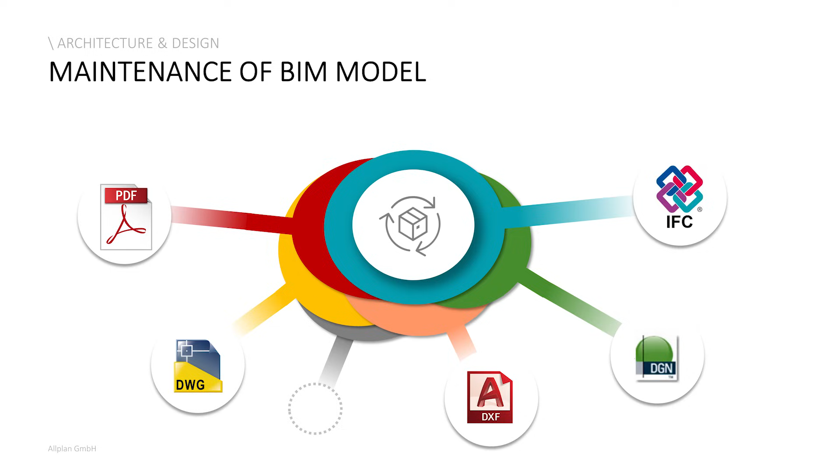With this demand, we will introduce a reference manager in Allplan, and it will support various file formats, but of course with main focus on IFC reference, with some further nice features.

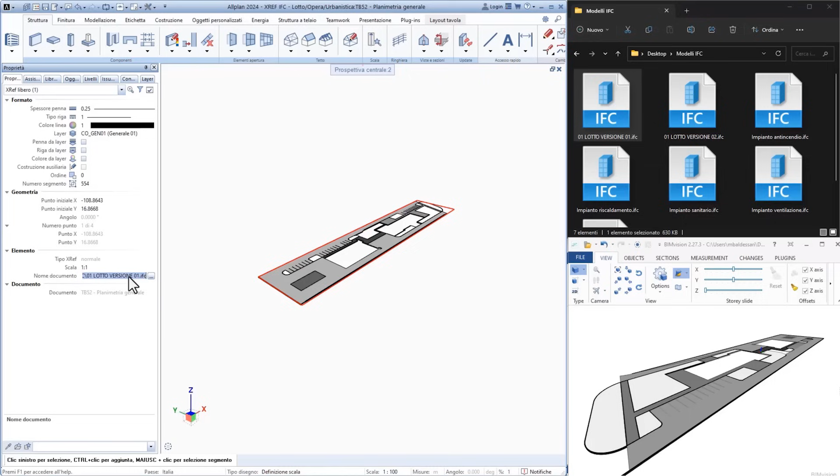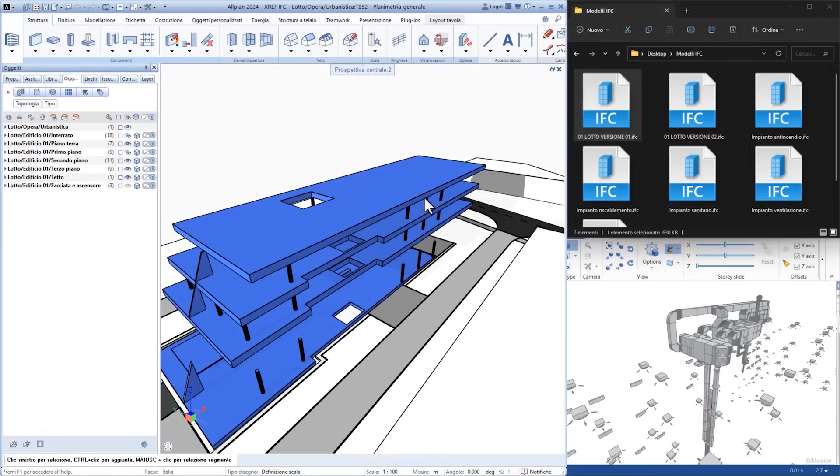Here is an example of how it currently works in Allplan. We have a situation when we don't want to import anything, just want a geometry check of two separate models. This means we need just something like a viewer in Allplan, and we can add some remarks or report issues. We could use a separate viewer, but we'd need to open an extra window, use the right viewer, and maybe export the latest version of our master model again - which really doesn't sound effective. So instead we can choose what we want to see directly in Allplan and add a custom XREF, a referenced IFC file. Check what is needed, and the job is done.

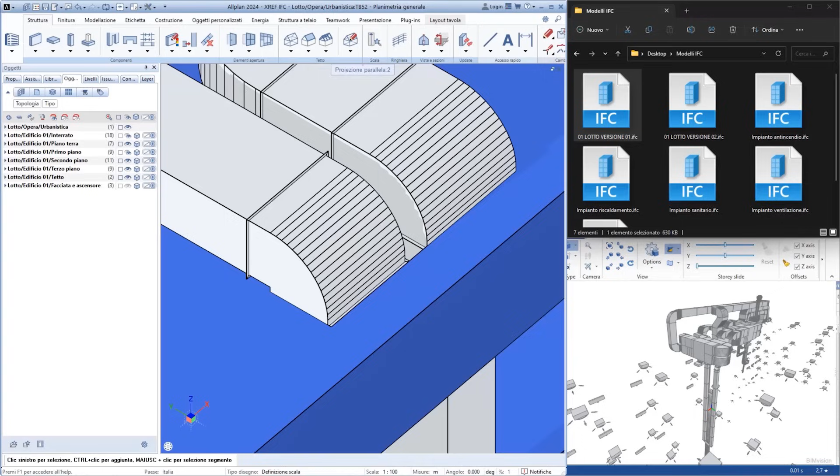But that is, of course, not everything for IFC reference. We are preparing more functions which will make life easier, such as preview of the IFC file, checking attributes, and filtering elements. Also, with XREFs, we are thinking towards CDE platforms, where there should be a connection directly from Bimplus, and probably other services, as part of the Allplan Cloud package - because Bimplus is just one part of the cloud.

Well, let's see - Allplan Cloud combines the functions of Bimplus as well as the previous individual products, meaning Allplan Share, Exchange, and Workgroup Manager. It is a cloud-based model management tool containing other applications like IFC Viewer, and services like AutoConverter, which will be introduced for exchange with static solutions.

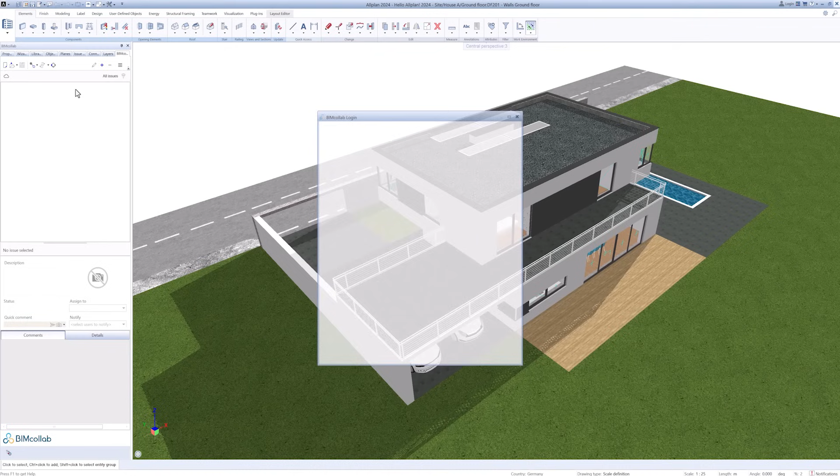We are working on more integrations with other Nemetschek brands - for example, we currently have integration with Solibri Inside. But we are still staying open to different ideas, such as a cloud-based solution from BIMcollab. BIMcollab is another issue management tool, so that users can connect to their BIMcollab project directly from Allplan.

With a dedicated palette, they can create and edit issues without the necessity of manual BCF import-export, which users with restricted cloud environments will for sure appreciate.

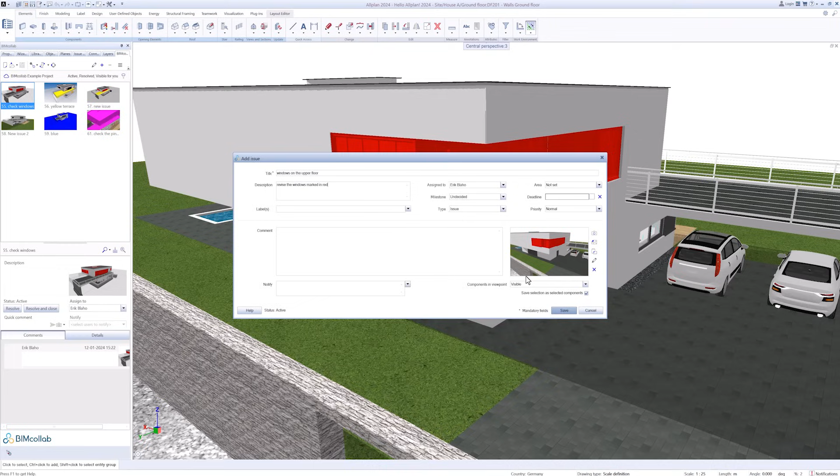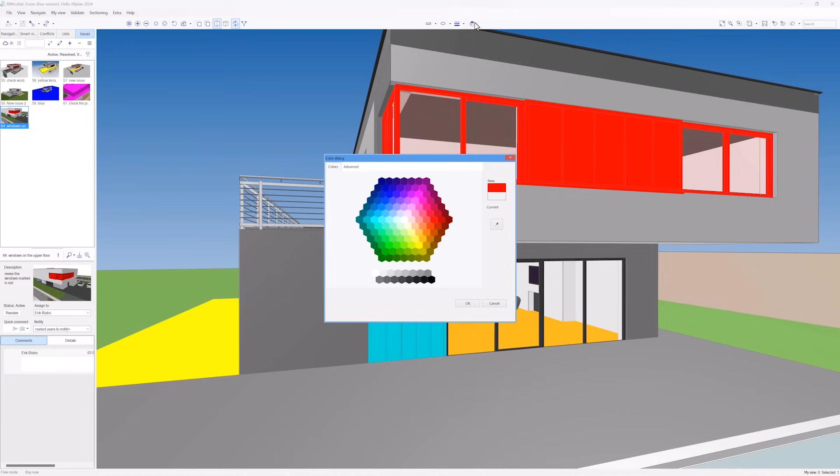With the Allplan 2024-1 release, we accelerated checking processes, which means enhanced collaboration, and the amount of information a single issue can contain is enlarged. Other benefits of smoother workflows are, for example, pointing to specific elements more effectively, viewing settings of an issue, and creating specific settings for colors, transparency, and visibility of objects in the model. This is an advantage because now settings are stored within the issue and can be displayed across platforms.

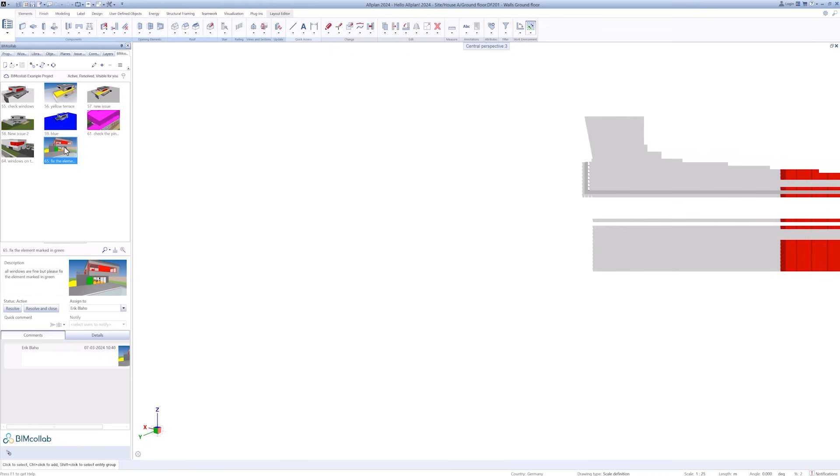That's not the only new cooperation with different platforms. These days, environmental topics are crucial, and there is a need to be more responsible with decisions about the whole building life cycle. So we offer now a new cooperation with a life cycle assessment tool, one-click LCA.

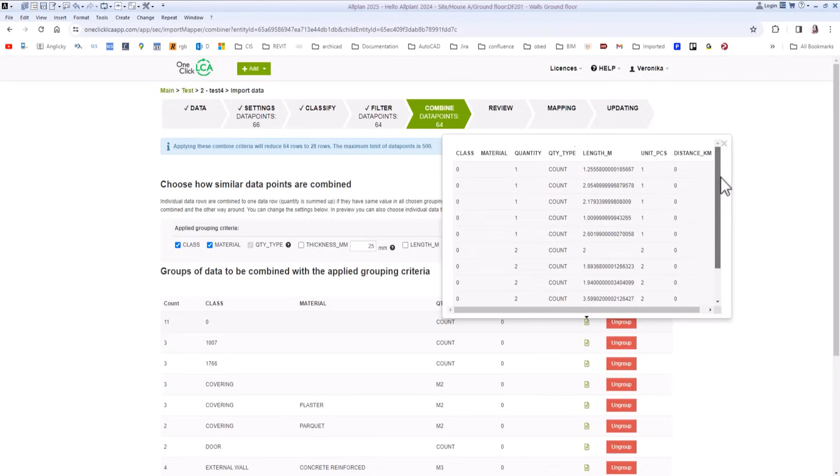This tool is integrated into Allplan as direct export to the one-click LCA web, and that is how we can get information about the environmental impact of the chosen design and materials. In Allplan, we can add extra LCA attributes to help with more accurate analysis. Once this is done, we can upload our project and get the results. Then on the website, there are more options for how materials and objects could be classified.

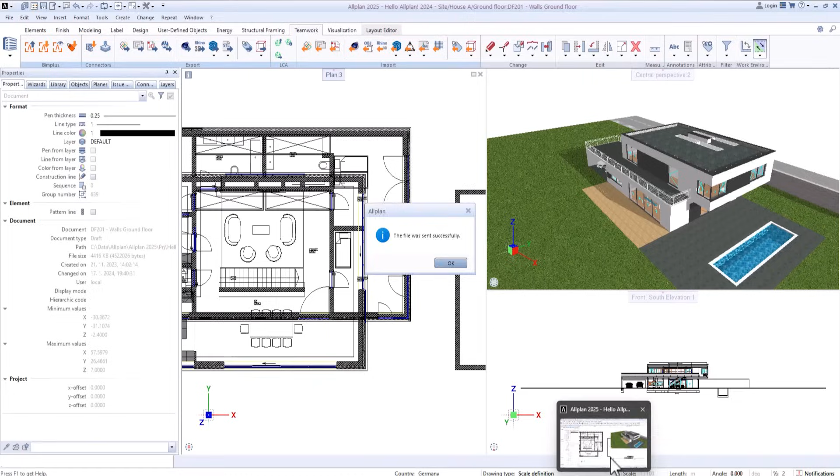When we want to focus on final results to choose the best design, it needs cooperation of more specialists who may use different software. How can multiple different offices use that? Well, the simplest option is getting data by uploading it as a table format, which also makes it no issue to export elements and object quantities offline to XLS for further analysis.

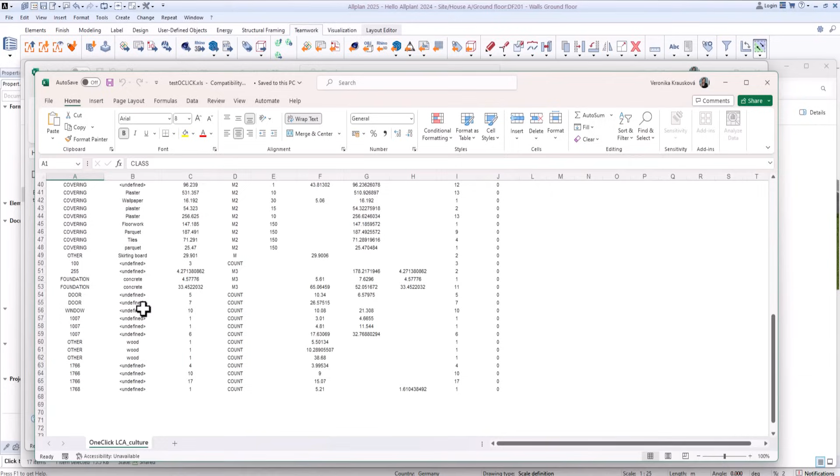When we go back to the project, we can get a really quick overview of where we stand with our building. Of course, the more precisely we define an object, the more precise numbers we get in the end. But in general, the amount of added information, as level of detail or development, should be a matter of BEP, which is BIM Execution Plan. With more details, the size of the project will naturally increase.

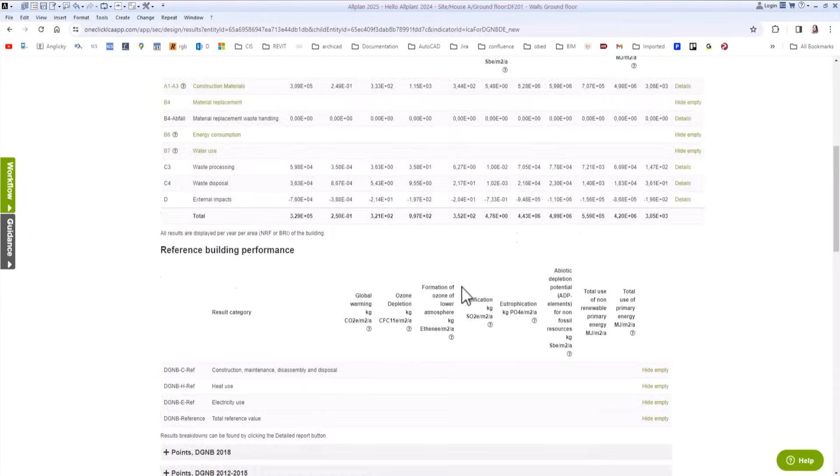Some time ago, the discussion was about how to implement BIM with effectivity, but in recent years the discussion is going further, about the situation that analysis of data has reached a completely new level, which is nothing else than AI. If we are talking about the future, there is no way to avoid this topic, because for getting reasonable decisions, it is a powerful tool.

Anyway, AI analysis is being already used. And with easy and available various types of analysis and data science, we may get back to the beginning and actually be again overwhelmed with a long list of deep data analysis. It is a complex problem.

What maybe ChatGPT thinks about this situation? A future of software interoperability, including the response that it's unpredictable, but it's interesting that it thinks besides the rules and standards, about its own limits. What gives us a notion of how to deal with the issue of the load of analysis?

It's easy to think that AI systems can seamlessly exchange data and insights with each other, enabling complex and intelligent decision-making processes, as a future of perfect interoperability. But still, what is the source of the information base? It could be the project, what we set as a good or bad example, the quality of the data, or the quality of performed analysis.